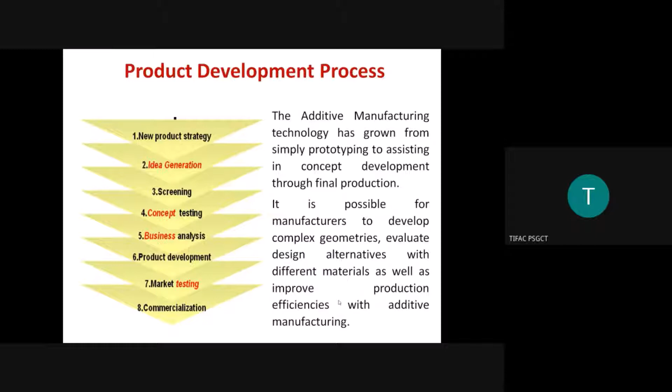So prior to the invention of CAD/CAM, the industry used to follow a conventional method of designing and manufacturing. Probably you can see on the screen a traditional process of product development. It is called a linear development.

There, the customer will pass the requirement to the marketing personnel, and the marketing personnel will communicate the requirement of the customer to R&D, where the new product development is to happen. Then it will go to the production personnel to make it suitable for manufacturing, that means feasibility for manufacturing, and again come back. All these things happen in a linear way.

So the time consumption in this methodology, and the communication between departments, is very difficult. So in recent days, maybe within 3-4 decades, concurrent engineering in manufacturing emerged, where the complete team will be involved in the discussion, including sales, marketing, R&D, manufacturing, and specifically even the service segment, because the service side can give useful feedback about the existing product, what problems are frequently raised and how they are sorted out. So those problems can be addressed easily and taken into consideration while developing the new product.

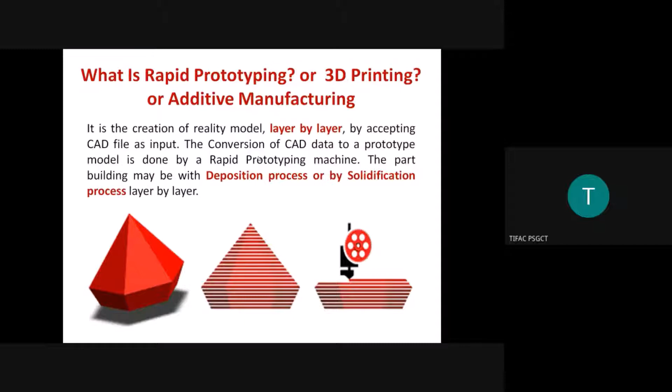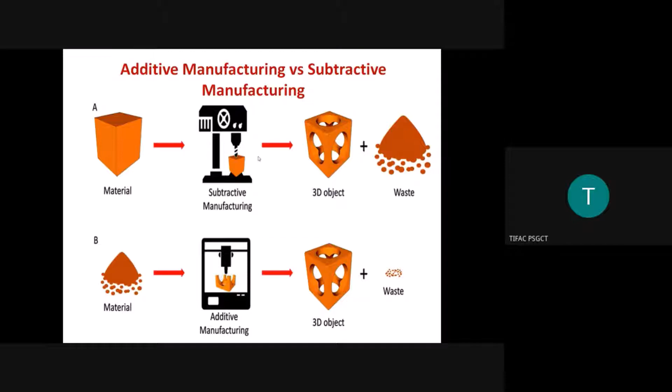Next, what is the difference between additive and subtractive? In subtractive, a block is given and unwanted material is removed, only the wanted material is retained, and there is huge material wastage. In the second category, additive, we use only the material wherever it is required. The wastage of material is minimized, and the realization is very fast.

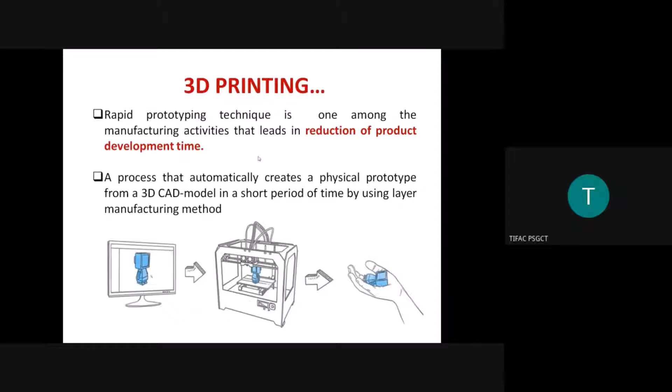You can see here no machining is required, so no raw material wastage. That's the thing. And on the bottom side you can see how the process happens.

The 3D CAD input is given in STL format to the additive machine, so there will be a slicing software. Only thing is you have to keep the orientation in a proper way. Orientation plays a lot of role there, specifically on quality and also on costing.

The slicing software available with the machine slices our CAD data into a number of layers, so you can have control on the layer thickness also. Every additive machine will have some 2-3 layer options. If you go for a thin layer, you get a smooth surface finish. If you go for a thicker layer, obviously the surface roughness will be there.

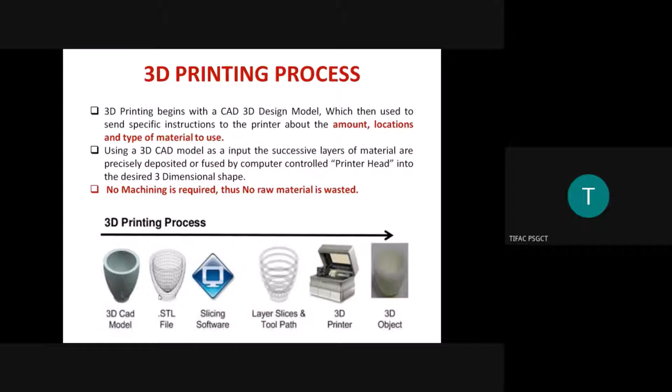So the slicing software will slice your CAD data into a number of layers. Then each and every layer, the input is taken layer by layer and given to the additive machine, which starts producing your model there. So this is the process.

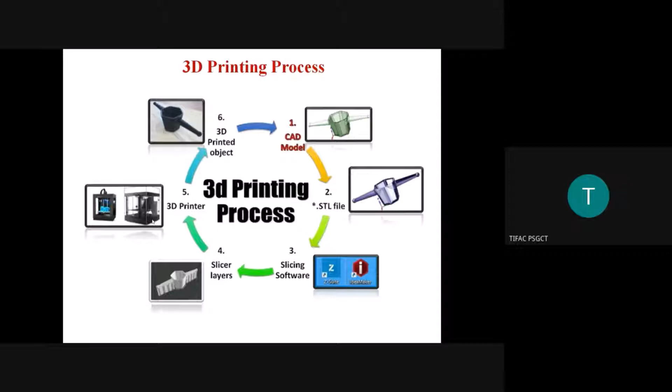You can see the CAD file, the STL, and slicing. Once the layers are fitted, the machine has two parts, software and hardware. The hardware side is the manufacturing side, and the software side supports the slicing and orientation. So this is a brief idea about additive manufacturing, and this is why the prototype is required for industrial applications.

In most of the cases, it would be a scaled down version. In case your product is huge, it may not be able to be built in your additive machine, which has a limitation of build volume or build platform size. So the scaled down version is largely used, depending on the product size.

And your prototype developed with the support of additive manufacturing can be used to communicate to tool engineers, process planners, manufacturing engineers, and marketing personnel about the product feature.

So even it will be largely used to make a survey in the field. The proto model, whatever developed, would be given to marketing personnel or sales personnel who can carry the scaled down version to the customer and explain to the customer, take feedback from the customer during the product development itself, and do all the necessary corrections according to the input received from close clients.

Close clients means the clients who work very closely with our industry. We will be having different kinds of customer cycles. So close clients can be easily interacted with through the proto model, and you can explain to them how the new product is going to function.

At that time, the end user can easily give their input so that necessary corrections can be done on the design. And in most cases, the proto model can be used for various kinds of analysis, like stress analysis, and it can be used to check the assembly. Any interference happening during assembly can be easily checked.

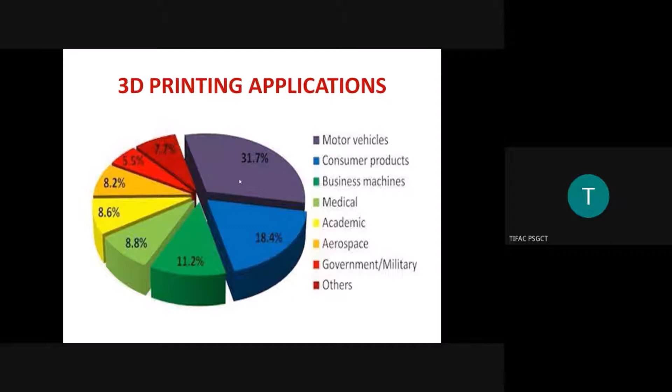And where it can be largely used - development of any new product can be reduced from months to days, and an engineer can test ideas easily. That means in R&D applications, it is largely used.

It can support doctors to communicate the issues to patients through tangible models, and even in some cases, it supports doctors to plan complicated surgeries and reduce the time. And even for students, it can be used as a teaching aid, using the output from the additive side. I will share some examples later in the presentation.

And it's also largely used in architecture. Product developers can discuss market potential with prospective clients using the proto model developed with the support of additive manufacturing, and verify the design before investing in a very expensive molding tool. That is the other big advantage for the molding industries.

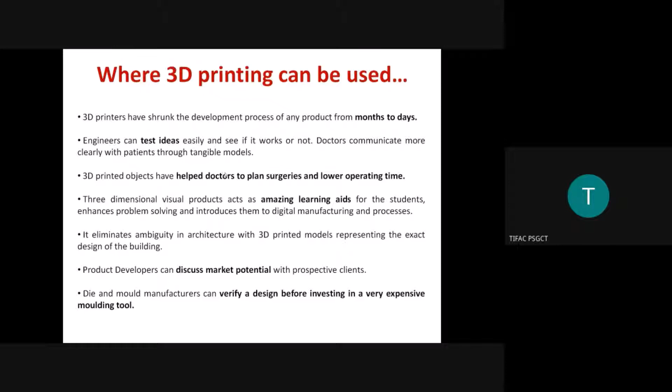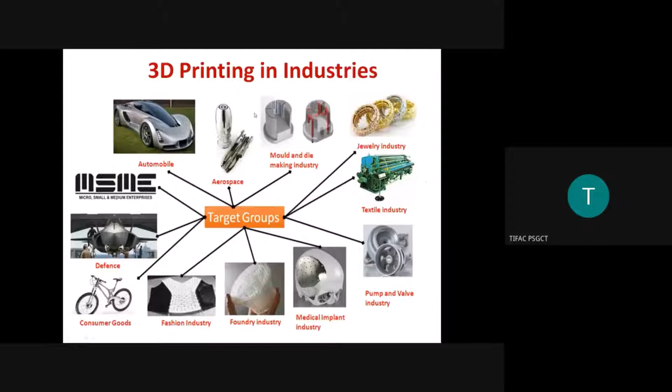Okay, so this we have already seen, and you can see here the foundry industry before invention of metal additive manufacturing in the early stage, the 90s and early 2000s. This additive process was largely used to produce patterns for investment casting. Foundry industry was using this because in case of any pilot level manufacturing with minimum numbers of 50 or 100, there's no need of investing on tools, so the patterns can be produced by additive itself. You can see here what are the target groups that can use additive.

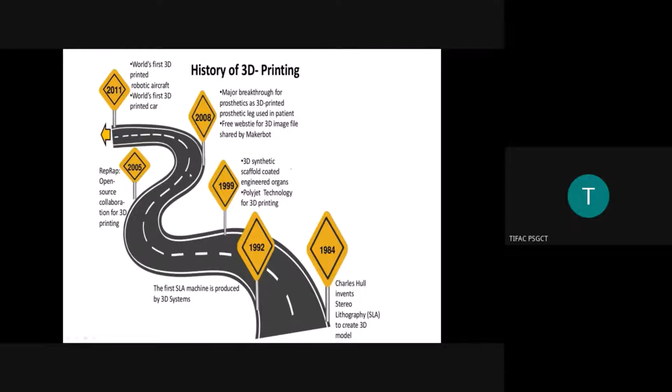Later, this particular technology based machines were produced by a company called 3D Systems. The very first machine was launched in 1992, and later on plenty of developments happened. You can see the roadmap, in 1999 PolyJet, and fused deposition modeling, and later on different kinds of technologies that we are going to see in the coming slides.

This slide may be having problem to view, but I have split this up in the future slides. So various kinds of methodology, the classification of additive based on various applications. The very first is VAT photopolymerization, largely for plastic additive manufacturing, and material extrusion, also largely for plastic, and material jetting, again for plastic and sand, and binder jetting again for sand, and powder bed fusion, MJF multi-jet fusion for plastic, and SLS again for plastic, and DMLS and SLM for metal, and electron beam melting again for metal, and direct energy deposition/LENS again for metal, and EBAM also for metal, and laminated object manufacturing.

So these are some of the overall classifications, but not all the technologies are largely used in industry. Now we will go one by one.

So let us start with VAT polymerization. The most common machine nowadays available in the additive market is stereolithography, SLA as we generally call it. This technology was developed by a company called 3D Systems, and later on 3-4 companies entered this field. The next thing is digital light processing, DLP as we generally call it. Both are almost the same.

Raw material is the liquid resin kept in a vat. In stereolithography, a powerful laser system is used for solidification, while in DLP the light source is used as the energy source. Continuous digital light processing is another variant, which would be comparatively faster than these two technologies in production.

Now let us go to stereolithography, the SLA technology. The term was created in 1986 by Hull, founder of the 3D printing company called 3D Systems. In 1992, the first machine was launched into the market, and later on you can see a series of machines - Projet 6000 series, 7000, ProX 800. All these machines are owned by 3D Systems, and probably this technology we all know about.

You can see inside, a vat full of resin, photocurable resin, which is the raw material largely used for stereolithography. You can see a moving piston, and this is the build platform. In the initial stage, this platform would be on the topmost layer of the resin. There are other inclusions here like the power source laser and also scanning mirrors to scan the 3D model, the CAD input that we are getting, and diverting the laser power into the machine.

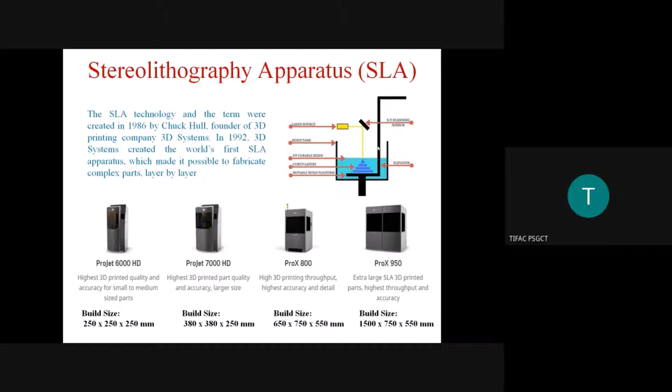This is a kind of digital light processing. The whole image of the particular layer would be scanned and given to the energy source, so it is not like SLA where the laser moves layer by layer and each profile is drawn over the liquid polymer. Here, all the profiles in the particular layer are taken together, and solidification happens at one stretch for the complete layer, so the process is comparatively fast in DLP.

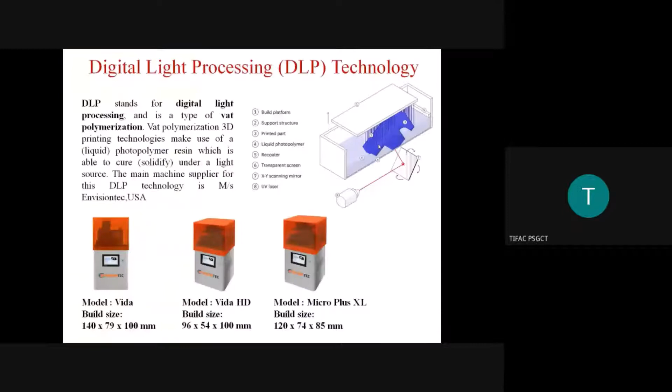So this is another technology in VAT polymerization. Next we are going to see material extrusion, generally called fused deposition modeling, or FDM. Here the raw material used is again plastic, in filament form.

This filament process will be shown in a small video to explain this. The prototype starts as an STL file generated from a 3D CAD program.

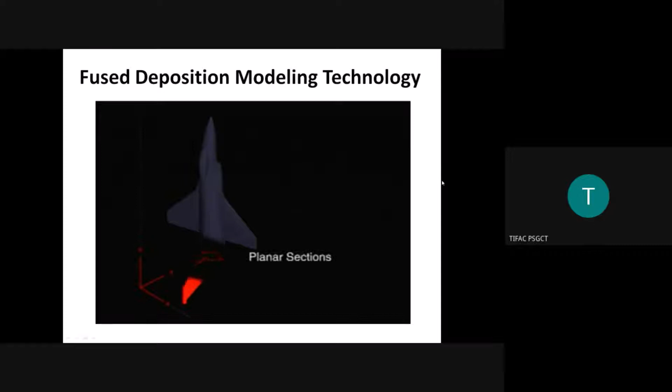The model is oriented within the computer exactly as it will be built in the FDM machine. Orientation may affect build time, strength of features, and support material generation. Once the model is oriented, the software divides the model into evenly spaced planar sections, each measuring as small as a few thousandths of an inch. Supports are then generated for overhanging sections. Each layer consists exclusively of non-overlapping and non-intersecting curves. Tool paths are created in the regions, indicating whether the FDM machine should extrude model material or support material.

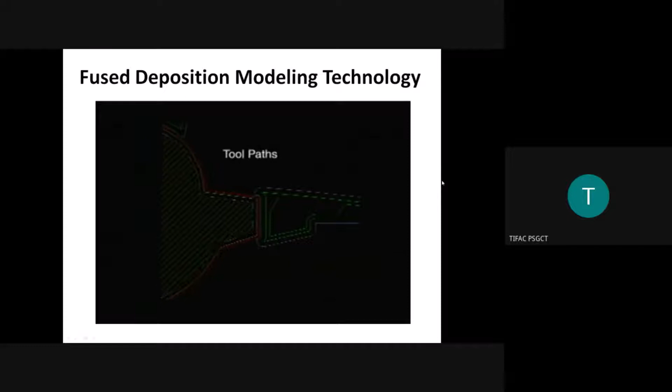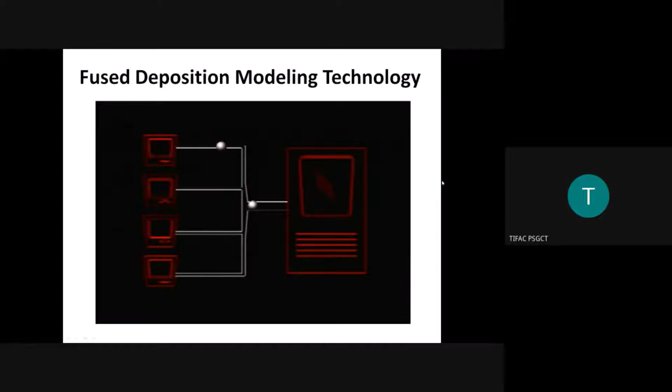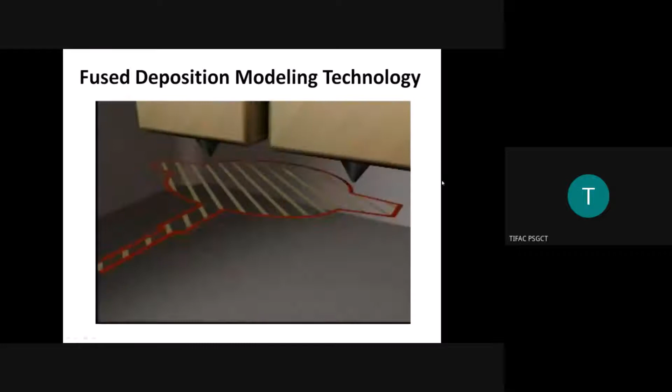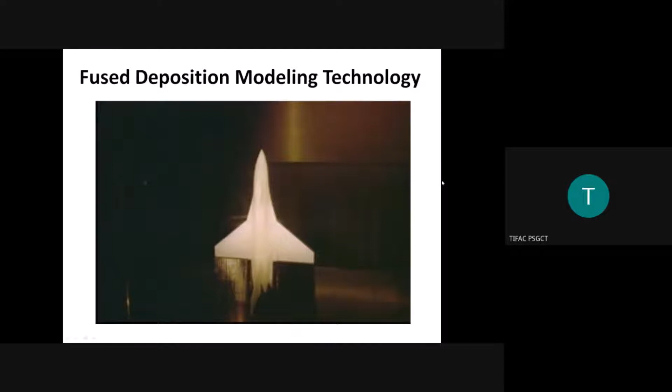Once the tool paths controlling the XY movements have been generated for all layers, a file is created and sent to the FDM machine. Inside the heated build envelope, the model material in filament form is heated to a less viscous state for extrusion. The model is built layer by layer from the bottom up. On each layer, the extrusion tips follow the tool paths calculated in the computer. After each layer is completed, the plate drops and a new layer is added. When the final layer is complete, the modeled part can be removed. After support material is removed, you are left with a strong, durable, and functional prototype.

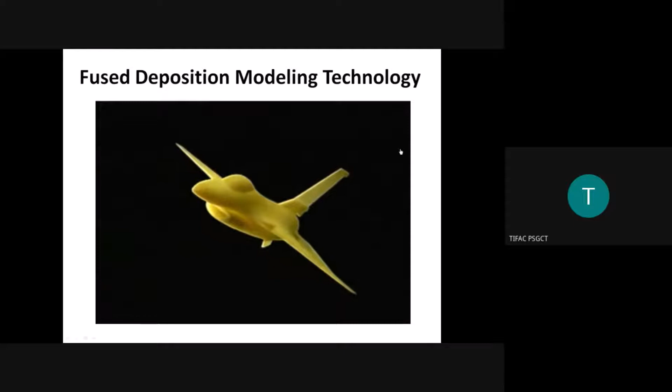So this is material extrusion. The filament will be passed through the extruders and will get liquefied. You can see a small reservoir for the liquid plastic here, and there are moving tips here. I'm explaining this very simply. The CAD input is taken by these moving tips, similar to our desktop printer, where data is taken from the CPU and printed on paper. The same way, the printing happens in a three-dimensional manner here.

There is one more tip here which injects support material wherever it is required. Support generation is very important in additive manufacturing, particularly whenever any elevated surfaces occur. In this case, you can see in the aircraft, both the wings. One second, I will just explain.

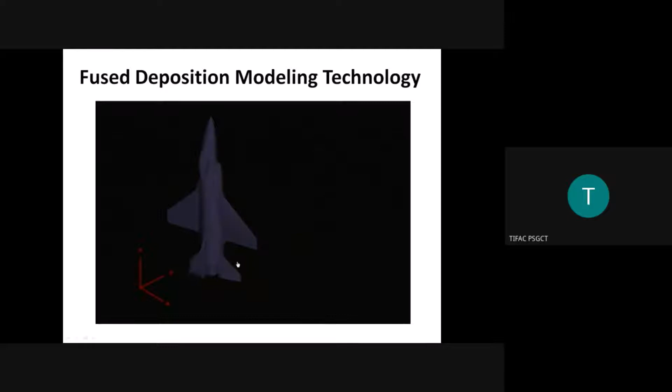The model is oriented within the computer exactly as it will be built in the FDM machine. You can see both wings are elevated surfaces which need support while building. So the machine will automatically build the support structure along with the model material, and wherever support is required, the system generates it automatically.

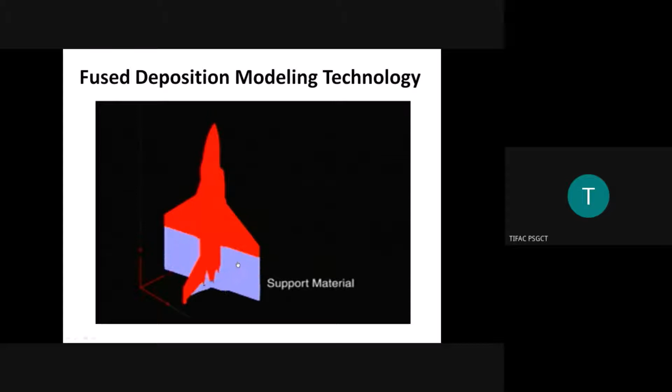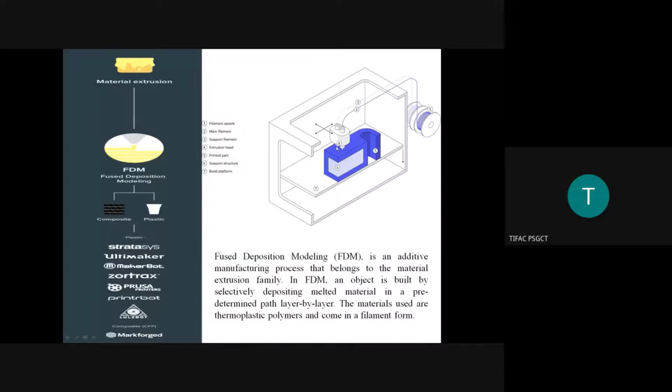Accordingly, the support material will be fed to the system. That's what you see here, the two extrusion outlets: one for model material, another for support material. This is one of the biggest machines in FDM, with a build dimension of 900 by 600 by 900 mm, and here you can see plenty of material options: ABS, PC, nylon.

Like in SLA, we also have material options, but the ranges are very limited in SLA, stereolithography, or vat polymerization, whereas here you have a series of materials. This particular machine is one of the most widely used machines in our center by our customers for job work, since the build volume is almost a cubic meter, and very big components can be easily printed in this machine.

So the main supplier of this technology is Stratasys. Nowadays there are a lot of manufacturers in the market. Once the technology opened up from the patent rights, plenty of companies came in, and a lot of desktop printers were developed. The term 3D printer was developed after the invention of this particular technology, because it prints like a desktop printer, so instead of calling it a 2D printer, we call it a 3D printer.

The next range of technology is material jetting. One is cured with UV light - material jetting. There is nanoparticle jetting cured with heat, and wax form is the DOD, drop on demand. A polyjet 3D printer works like our regular inkjet printers. You can see the polyjet material in the next slide.

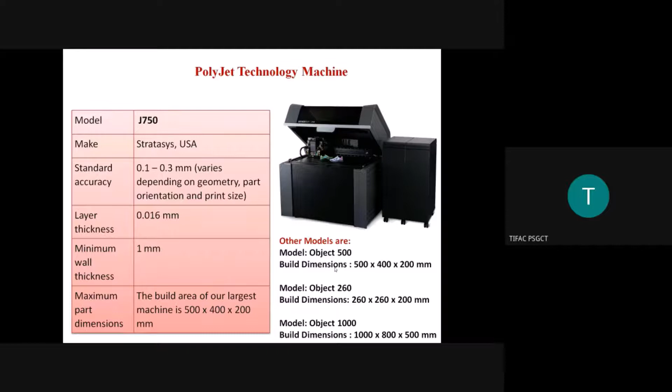This technology was largely developed with support from Stratasys. Nowadays, I think 2 or 3 manufacturers are also in the market. The next thing is binder jetting. Binder jetting selectively deposits over the powder. It's again a powder bed process, and basically the binder material will be spread over the powder wherever required.

That means wherever the profile comes, in that area the ink would be injected, and it will bind the material. It's basically a binding agent that binds the material. At the last stage, it is basically heat curing based or UV based - it varies. So once the binder agent is spread over the platform wherever the profiles are there, it can be cured with support of either temperature or an energy source like a laser.

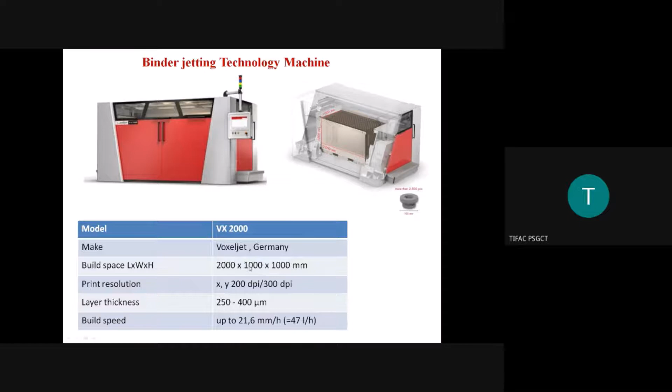The main company here is called Voxeljet, from Germany. You can see the build space of 2000 by 1000 by 1000 mm, largely used to develop sand casting cores with this particular technology. The other one is multi-jet fusion.

Here actually lamps and light sources are used for curing. Here there are two agents that should be added: one is the fusing agent, and again it's powder bed only. Over that, first the fusing agent is injected over the platform wherever the profiles are, and then a detailing agent is added, which is injected around the contours to improve the part resolution.

All uneven surfaces can be easily finished. Once this process is completed, the lamp will pass over the surface of the powder bed, where both chemicals react with each other and capture heat from the light, and automatically the part is fused. So HP is the main producer of MJF technology-based machines. These three come under fusion.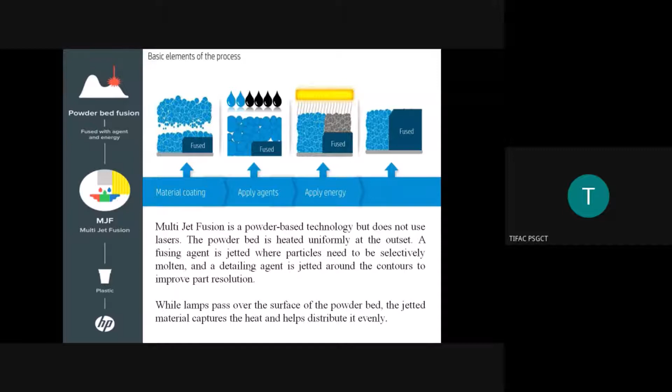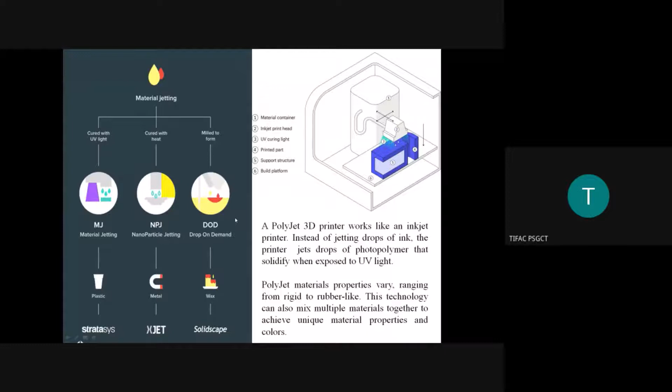You can see here once again: material jetting with UV light curing, the second type is heat, and the third is drop on demand. This DOD technology has very limited use - it's largely used in the jewelry industry. And the next thing we are going to see is sintering technologies, generally called powder bed fusion.

The very first one is SLS, developed long back, probably around 2000, and introduced into industrial application. Again, 3D Systems and a company called EOS were involved in the manufacturing of this machine.

Here there will be a build platform where powder will be spread over, and there will be a laser on top, like in stereolithography. The scanning will be done, input taken from the CAD file, and the laser will move on the platform. Wherever the profile is, that particular area the powder will get fused, and the rest of the area the powder will remain in powder form.

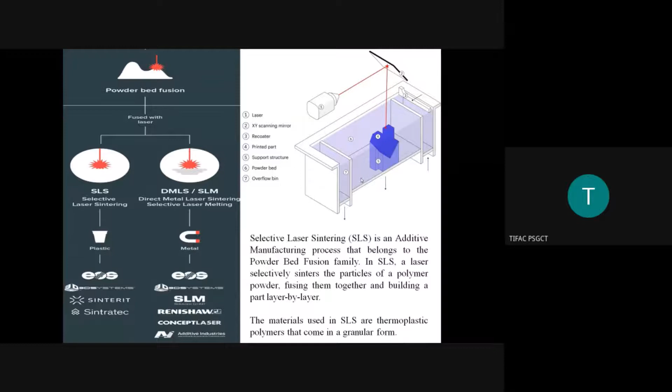Layer by layer, once a particular layer's fusion or polymerization is over, the build platform moves down, a fresh layer of powder is spread over, and the next layer's information is taken and fused. The whole build platform is maintained at a particular temperature so that the adhesion between internal layers is perfectly maintained.

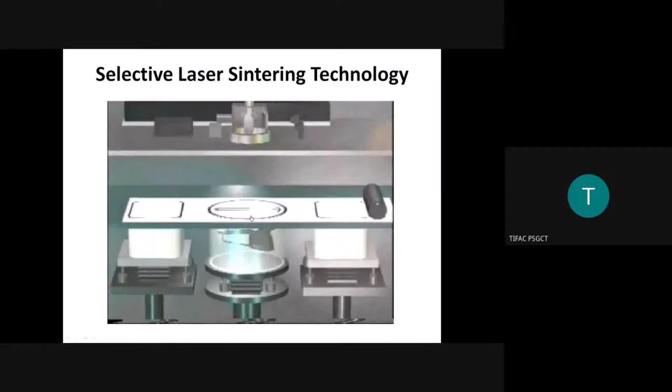You can see a small video clip of this. It's a powder spreader, and the laser scans over the surface, causing fusion. The build platform moves down, a fresh layer of powder is spread over, and again the laser takes input from the CAD data for fusion. This is called the selective laser sintering process.

SLS is one of the oldest technologies after SLA and FDM. SLA was introduced first, and SLS and FDM were introduced almost in the same period.

You can see the brief specs of this particular machine. Normally the build platform size varies according to the manufacturer. The effective build volume, for this EOS machine taken as a case study, is 340 by 340 by 600 in XYZ, and any component of this size can be built in this machine. It is not that bigger components cannot be built in these machines.

In case the part size is bigger, we cut it into 2 or 3 pieces, process it, and glue it after the process is completed. That is quite possible in industrial application. Mostly service providers have various kinds of build platform sizes, so the build platform size plays a big role, specifically in commercial centers.

You can see the build speed here, 48 mm in height per hour, and layer thickness can vary. You can build at 0.06 mm, 0.1 mm, or 0.12 mm, adjustable. Largely, a carbon dioxide based laser is used, with laser power in stereolithography as well as SLS being less than 50 or 70 watts only.

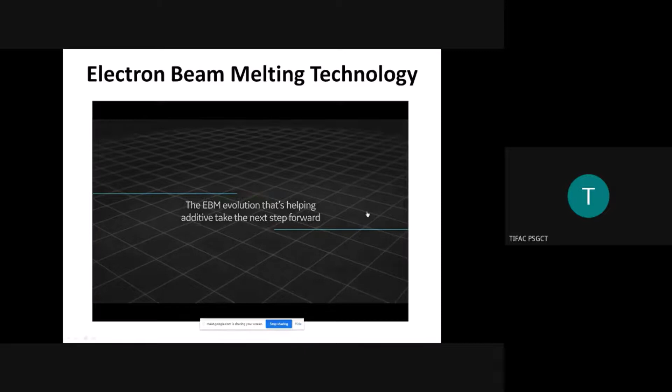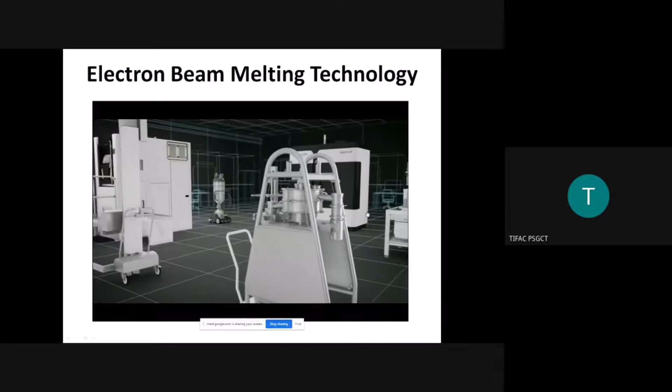The additive manufacturing industry continues to accelerate as more and more businesses see the value in this revolutionary technology. Setting the pace is GE Additive's latest EBM innovation, a system that's enabling a new phase of high-volume industrial production. At the center of this next-generation system is the Arcam EBM Spectra H, a machine capable of producing parts at temperatures exceeding 1,000 degrees Celsius, has increased build sizes and speeds while simplifying operation.

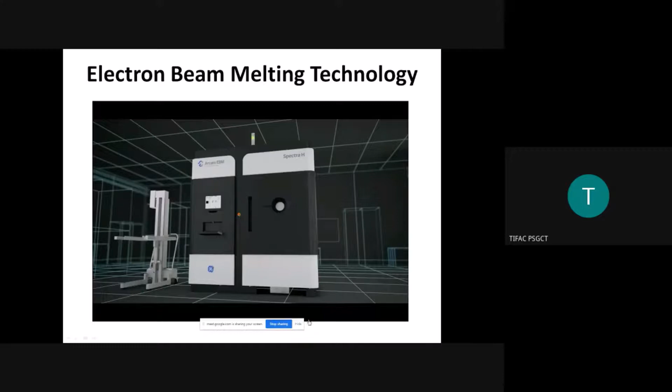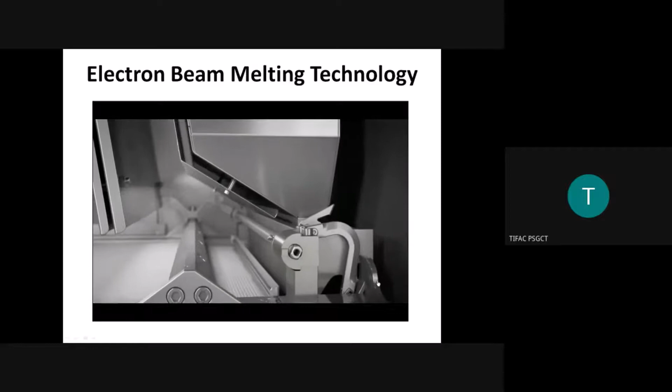Spectra operates within a closed-loop system to create a dust-tight environment, ensuring powders are completely contained and never cross-contaminated or exposed to external elements. It starts in the powder hoppers, featuring an automatic shutoff valve that eliminates the risk of powder spilling. A new powder distribution system automatically creates a smooth, even layer for optimal part production. This simplified build preparation ensures reliability and repeatability while reducing dependency on manual operators.

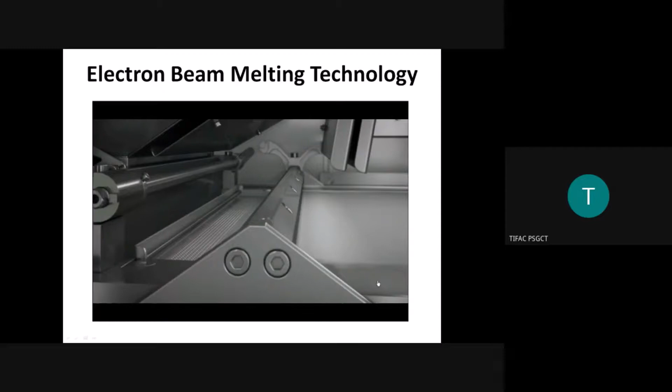Key to Spectra H's ability to deliver market-leading high-temperature production is the newly designed build chamber. Movable heat shields create improved insulation, forming the ideal environment for exceptional part production. An auto-calibrated 6-kilowatt beam delivers a 100% increase in power to provide up to 50% faster builds, allowing manufacturers to begin transitioning into high-volume outputs.

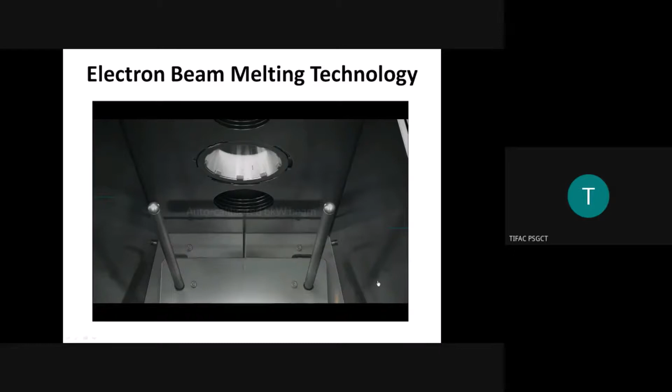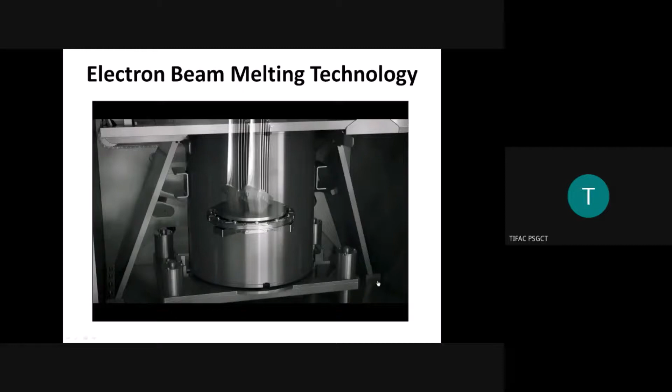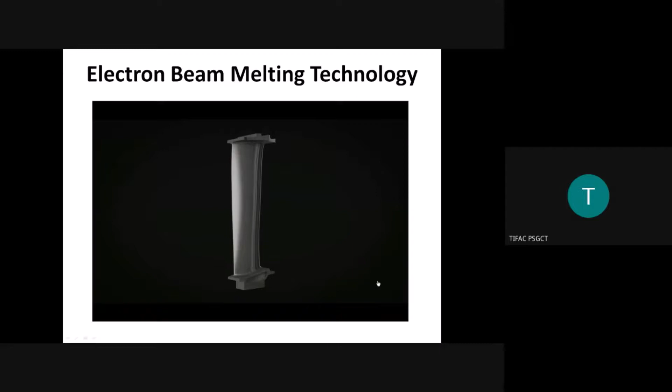Boosting production capacity also comes from Spectra H's expanded build volume, 39% larger than the previous generation EBM machine. With this extended platform, it's possible to print larger parts than ever before and produce more parts at one time. And with Spectra H's high heat capability, users can incorporate new alloys such as titanium aluminide into production to expand their offerings, including high-temperature anti-corrosive materials.

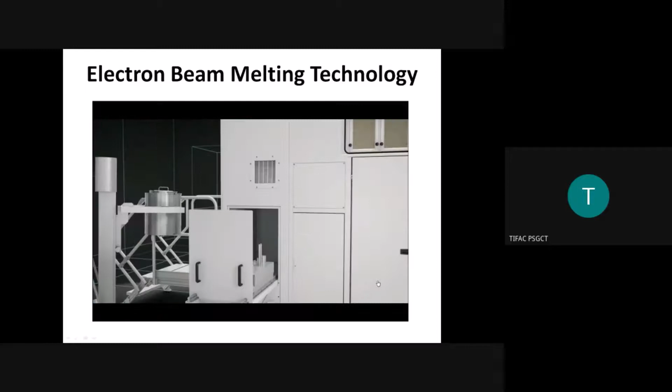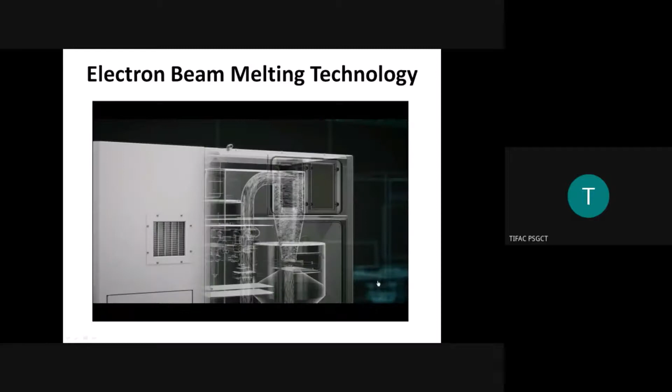When the part build is complete, the entire build tank is removed and placed in the Spectra Powder Recovery System docking station to maintain powder integrity. Once in position, the part is cleaned with compressed air and powder. In the PRS, smaller particles are removed in a cyclone cleaner. After that, the powder passes through a magnetic separator to remove any metallic satellites picked up in the cleaning process.

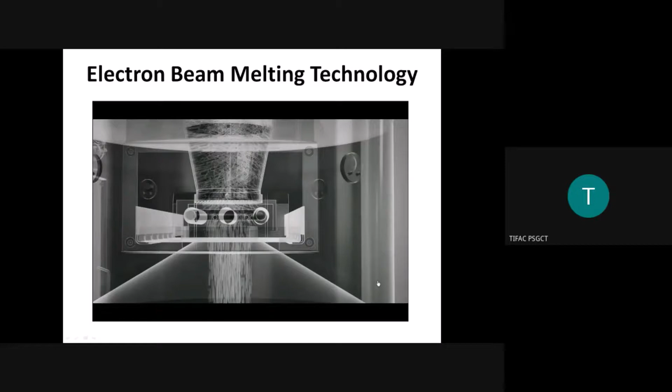After the part is removed from the PRS, the loose powder is automatically transferred in a closed system to a barrel. The closed loop process is maintained as the sealed barrel is moved to a newly designed auto-dosing sieve, where oversized particles are separated, and the powder again passes through a magnetic separator. Faster builds, increased reliability, and leading production at high temperatures. The Spectra H next-gen EBM system delivers a new level of performance.

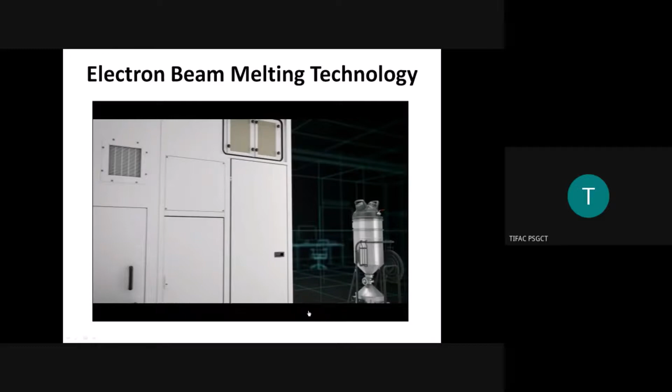Probably you can see the videos in the website itself. And the advantage of this particular technology compared to other metal additive manufacturing is the high energy source. When this particular technology was launched, even now the companies with EOS or SLM can't come up with more energy power than this machine. You can see here 3000 watts, 3 kilowatts beam power.

The advantage of using high energy power is that the temperature gradient would be maintained in a perfect manner, so that the residual stress of the component produced in this particular machine would be very less compared to SLM or DMLS machines.

The other advantage is all the laser machines are using inert gas atmosphere, whereas in EBM the complete build process happens inside the vacuum. So that's the other advantage. The homogeneity can be maintained in a better way, and contamination can be completely eliminated.

That's the reason this technology is largely used for aerospace and medical applications. A company in China has more than 35 additive machines at one place, largely EBM machines, to produce medical implants for various kinds of requirements like orthopedic and as well as different kind of medical applications also.

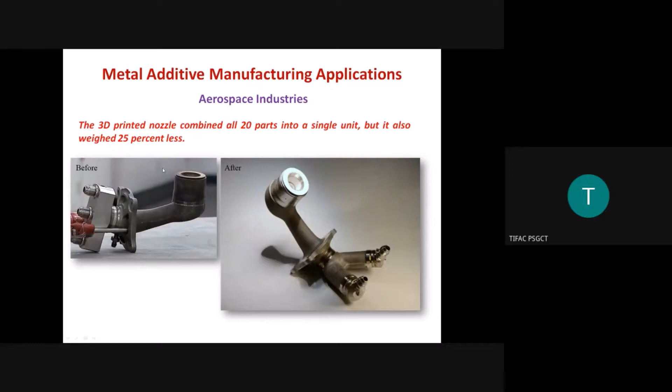In conventional manufacturing, it's an assembly of 20 parts to make it as a single unit, whereas in additive, you can reduce the number of parts, and it was built as a single component. Also material consumption, the weight of the part was reduced by 25%. That is what the aerospace industry requires.

So ARCAM, again we can go here, they have developed a material called titanium aluminide, which is largely used in aerospace application, normally for turbine blade kind of requirements. So if you visit any aerospace companies, there you can see they would be having more EBM machines than laser machines.

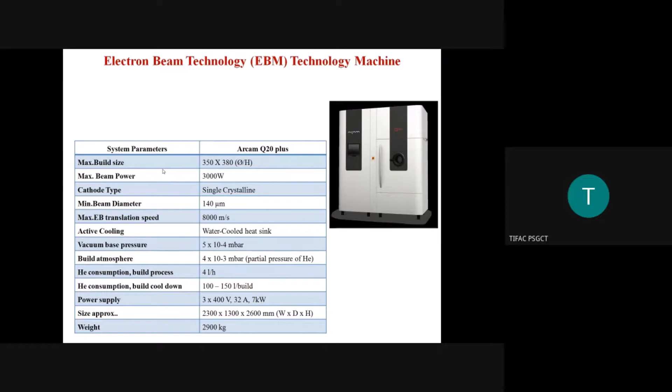That's the advantage of this particular thing. On the general engineering side, if you look into laser machine, it supports a lot, and material options you can see on the other side - we will discuss about that also.

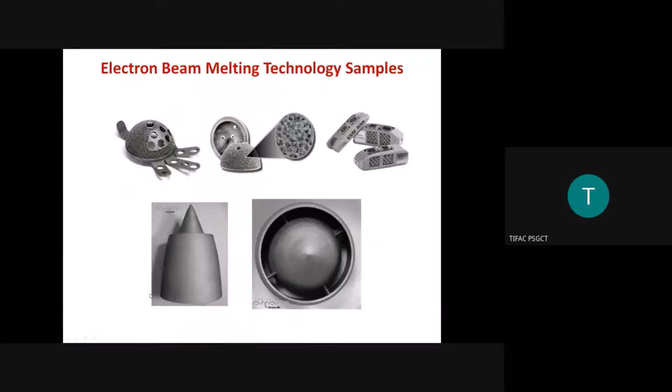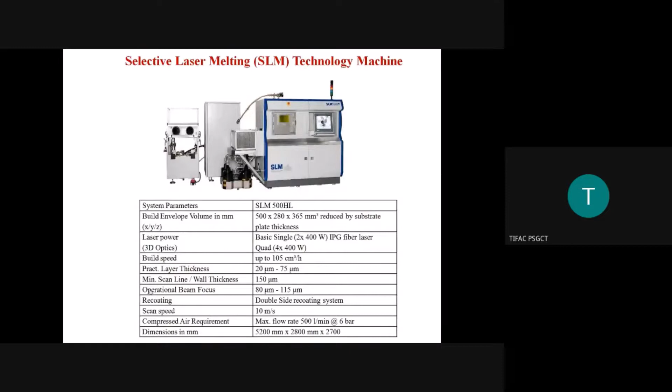In SLM and DMLS, laser will be used. In EBM the electron beam will be used as the energy source. Whereas here in direct DED, generally we call it direct energy deposition, you can see the energy source comes from the top.

Instead of powder material spread over the build platform in powder bed fusion, here the material also will be injected through the nozzle. And you can increase the nozzle numbers, either 2 or 3, so that you can use different kinds of material in a single build. That is the advantage of this particular technology.

So Optomec is one of the main major producers of DED machines. DED, you can see, has high build volumes, like 800 by 600 by 600, not like powder bed fusion. Powder bed fusion has a build volume restriction of around 400. Recently SLM has launched a machine with 600 by 600 by 600.

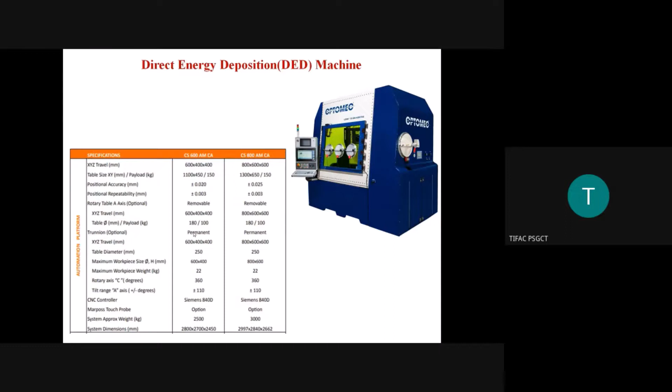This is DED technology. You can see here powder bed fusion, laser-based powder bed fusion, and electron beam based powder bed fusion. What are the material options? In the laser machine there are too many material options, except titanium aluminide. You can see titanium, cobalt, chromium, tool steel, stainless steel, inconel, aluminum, copper, tungsten, precious metal - all these things are possible.

Whereas in EBM, there are limitations in the material - titanium, cobalt, chromium, inconel, copper. Since the energy source is high, aluminum kind of material cannot be used here. The usage of maraging steel and stainless steel has been introduced recently, after recent developments at ARCAM - we got an opportunity to visit their global R&D center located at Gothenburg in Sweden. At that time, we could see the material developments happening there. So now 2 more materials will be added into EBM. These are the material options in both laser and EBM metal systems.

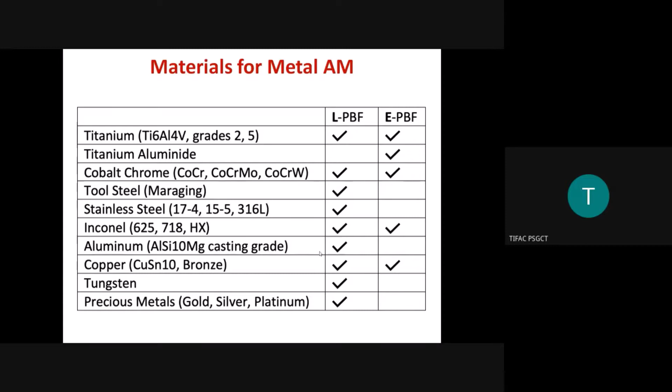Whereas in DED, there are no material restrictions. You can have anything - that's the advantage.

This we have seen, and these are parts which are produced in additive - medical implants. This is a hip joint, and this is for the cranioplasty kind of requirement for maxillofacial applications. Titanium is the material which is largely used, and cobalt chromium is for the knee joints. For hip joints, the industry largely uses titanium alloys. So these two materials have a lot of medical application in metal additive.

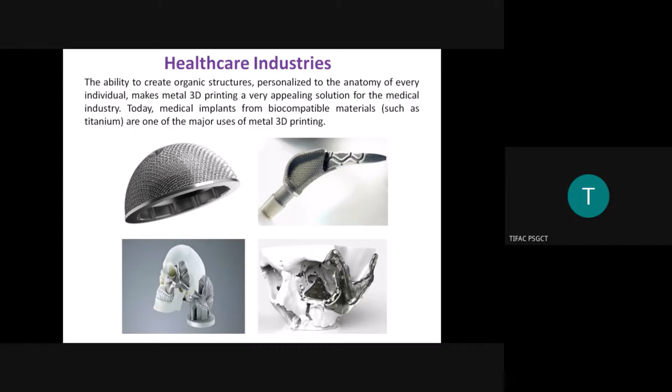You can see here this kind of complex parts can be easily built in additive, where conventional machines and conventional technologies will not support at all.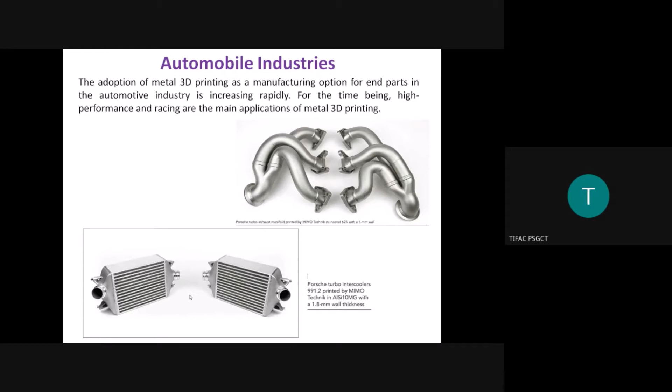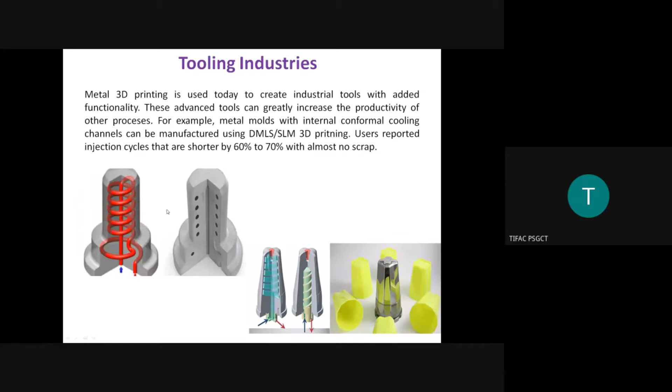This kind of conformal cooling channels for the tooling industry, in plastic injection molds, where the productivity can be increased 60 to 70% by cooling the tool immediately after one injection. That is very essential. So the conformal cooling channels are generated inside the tool, where the coolant is circulated to reduce the temperature of the tool. This kind of conformal cooling channel can be easily built in a laser-based machine, so metal additive machines can support the tooling industry largely as well.

Topology optimization is the other possibility. In metal, we can reduce material consumption in such a way, and also reduce weight. That is the reason metal additive machines are largely used nowadays to produce components for aircraft engine manufacturing.

Even some composite material based plastic additive manufacturing is largely used to produce seating systems for aircraft, where the lesser weight substitution of composites supports the industry to reduce the material weight.

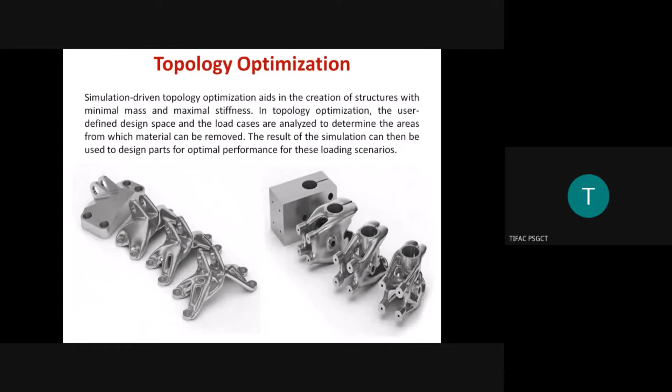Now for a small case study, I would like to present how PSG TIFAC CORE was involved in medical application for the last more than 18 years. The very first case was attended by PSG TIFAC CORE. This was a cranioplasty case - a person met with an accident, there was damage in the skull. This surgery was done in 2003.

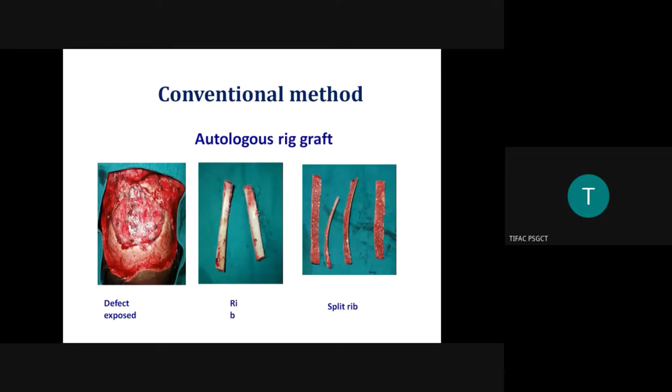What the medical industry regularly does is follow the autologous rib graft methodology, where ribs are removed from the same human body and the damage is covered with ribs and covered with synthetic skin. This was probably the first case in the country, maybe the first surgery performed using additive, at KMCH in Coimbatore in 2003. This case shows the right front temporal cranial defect.

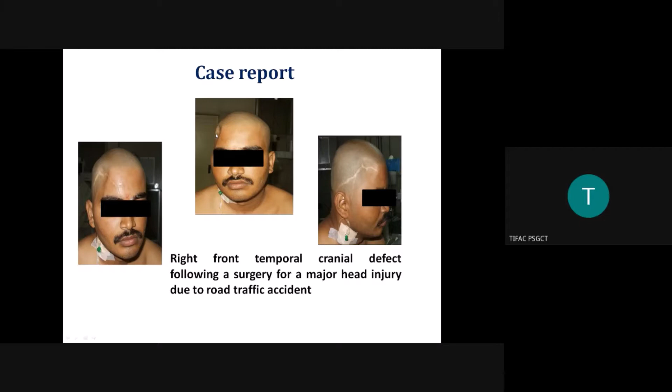At that time there was not much development in CAD software, so we used ImageWare, and there was no scanning kind of thing either. With the support of a doctor and engineer, a 3D model was developed using ImageWare software to fill this gap. The doctor studied the CT data and gave the tentative dimensions of this particular damage, and accordingly a 3D model was developed.

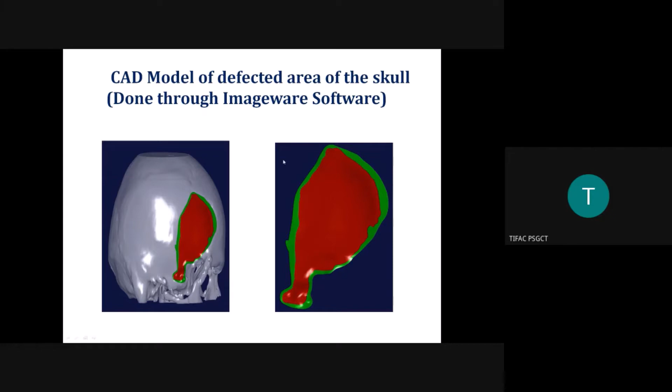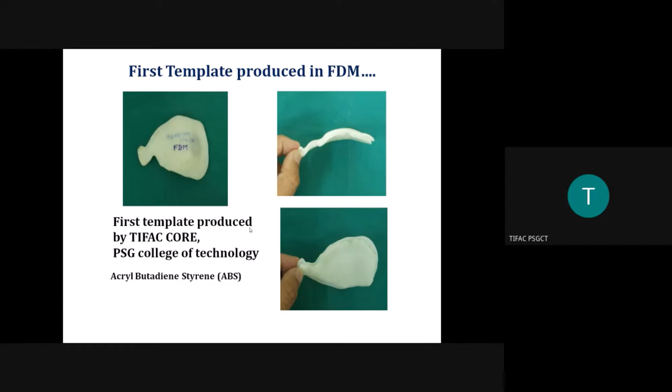In 2003, there was not much development on the metal additive side. So what we used was FDM to produce the template, but unfortunately we used ABS, which is not a medically approved or biocompatible material. This component could not be used directly in the human skull since it is not biocompatible.

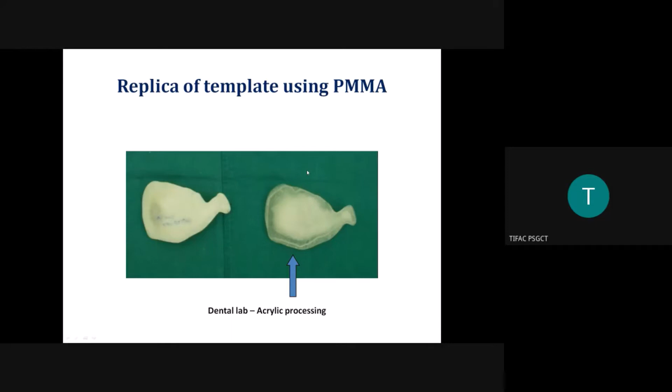So what we did was use dental lab acrylic processing technology to get the output from PMMA, polymethyl methacrylate, which is basically a biocompatible material. The doctor imported this material, and we developed a template, a kind of silicone mold, and filled it with PMMA. This was directly used in the human skull.

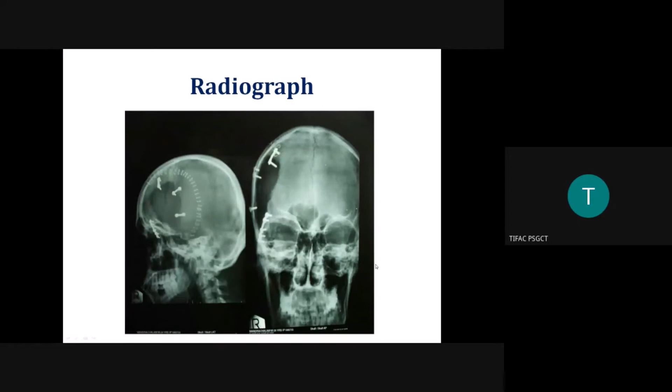An incision was made, the defect was clearly exposed, and surgical planning and positioning were done. Titanium strips and screws were used to fix it with skull support. The final fixation was done, and this is a radiograph confirming the presence of the implant inside.

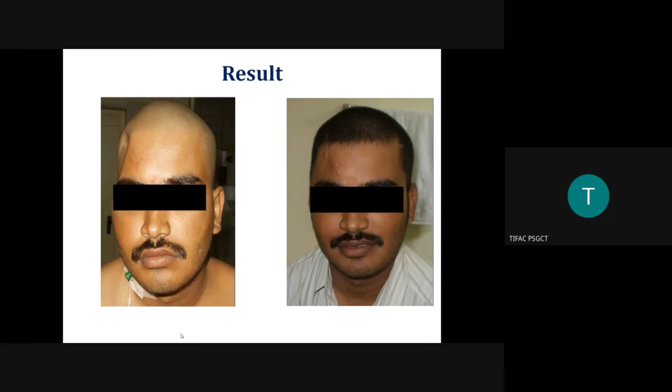This is the surgery prior to and after surgery. The patient is doing well even till last year. We meet the doctor regularly and inquire about specific cases. One interesting case was a 10-month-old baby with a twisted skull defect.

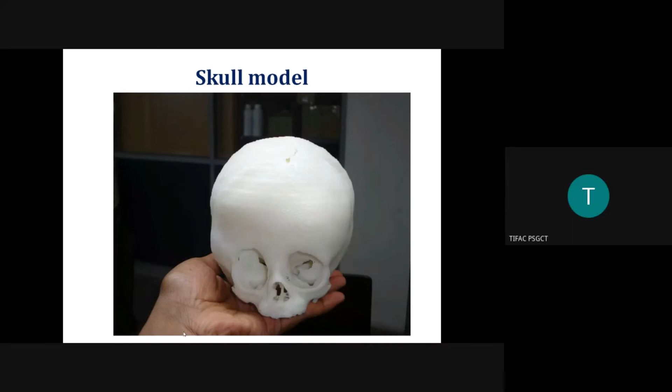An open cut surgery had to be performed on this 10-month-old baby, done at a hospital in Coimbatore. More than 8 doctors, experts from various hospitals of South India, were involved. The doctors wanted to conduct a rehearsal prior to the complicated case, so we took the CT data, converted it into a 3D printable format, and using a flexible material, built a model given to the doctor to conduct the rehearsal using regular surgical tools. That was the other case.

This is another interesting case, for maxillofacial surgery, all done before 2010-2011. There was a person with basically a cancer condition where part of the lower jaw was affected.

So the doctor went for an implant here, generally called plastic surgery. The patient wanted to maintain the same aesthetic as how he looked prior to the cancer, so the doctor used a titanium strip to take the contour for this.

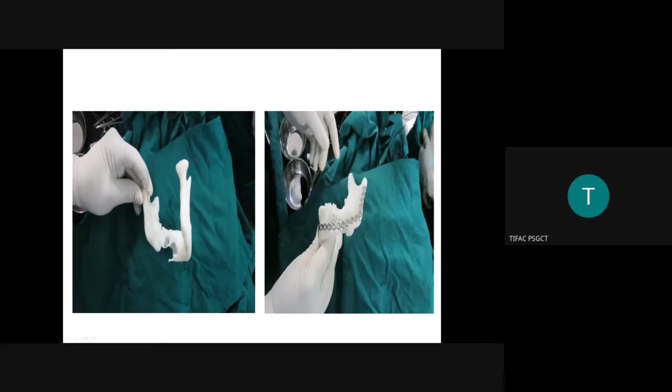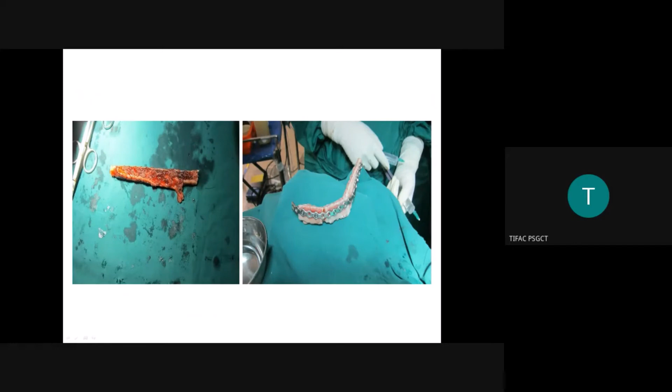This particular defected part was built using stereolithography and given to the doctor. The doctor used a titanium strip to capture this contour to achieve the same aesthetic. Later, he went for a bone graft, removing ribs from the same patient's body and filling them in, which was then directly incorporated into the lower jaw of the patient.

These are some of the cases we have done. About 1.5 years back, we handled a highly critical case: a 14-year-old boy with a thymoma, a kind of cancer located between the liver, lungs, and heart, all three important organs, of around 140 mm in size. It was pushing all the organs and causing breathing trouble for the boy.

It was a highly complicated case, and most hospitals were not willing to take it. The surgery was done at our hospital. We made two prototypes of the case and gave them to the doctor, who conducted rehearsals twice, and the third time they went directly for the surgery and succeeded. This is how additive manufacturing is supporting the medical field.

Still, too many cases remain due to time constraints. I was even telling the professor that if given a presentation focused purely on the medical side, I could give a wonderful talk, but the topic was already related to some other expert's area. Hopefully this information was highly useful for all the participants. With the time constraint, I think I have given some basic knowledge about various technologies in additive manufacturing. I would like to conclude here.